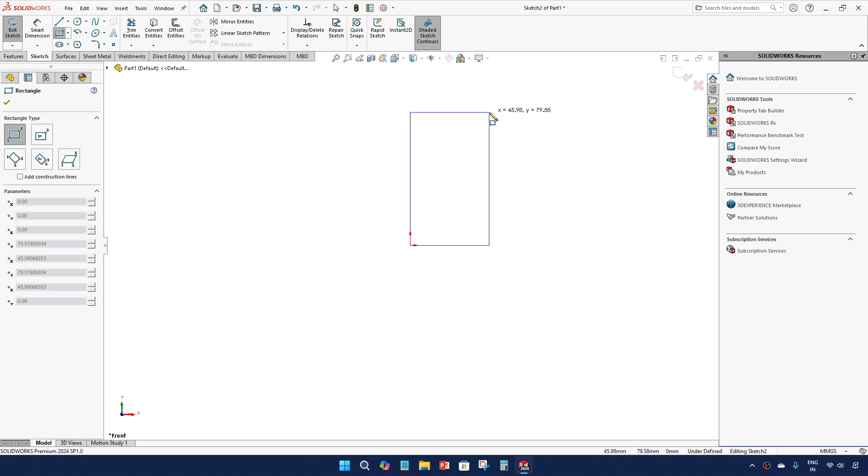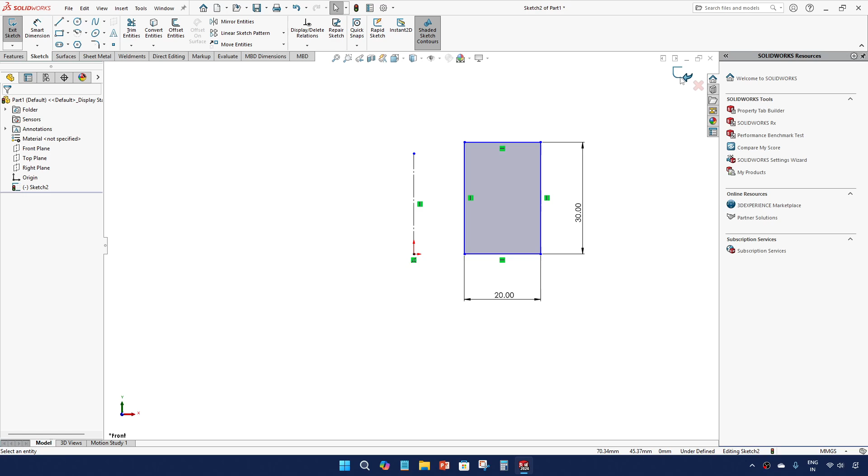So first I'll select the plane and I'll create this. Okay. So instead of creating at the axis, I will give a rotating axis. That's it, I'm not gonna constrain. Okay. So by selecting that axis, it has revolved my sketch.

So same as in extrude, up to vertex: if any vertex is there, it will revolve up to the vertex, and this is up to surface. This is offset from surface. This is mid plane, and I'm gonna explain everything to you. First, let's create one vertex and one surface.

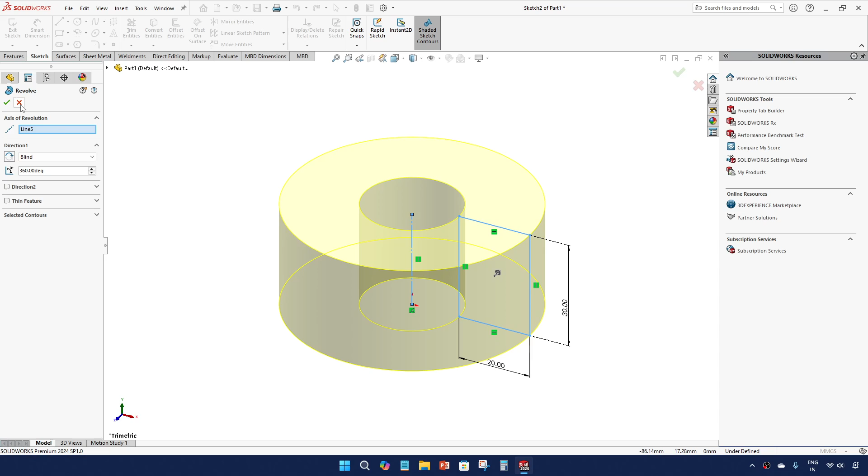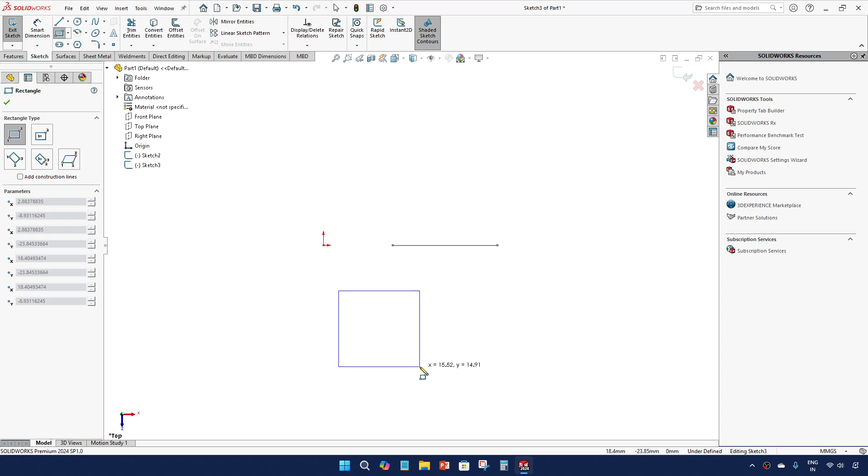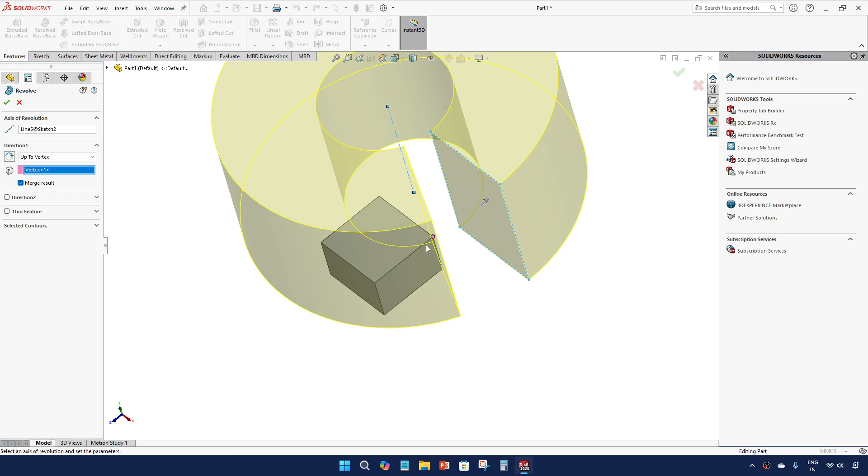Let's say just revolve. When I give up to vertex, as you can see, it is revolving only up to the vertex. If you flip it, you can see it is revolving only up to the vertex, same as up to surface also.

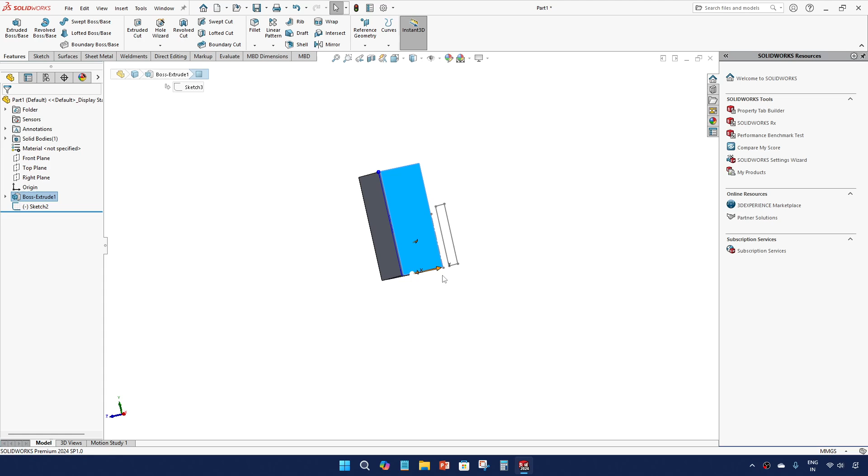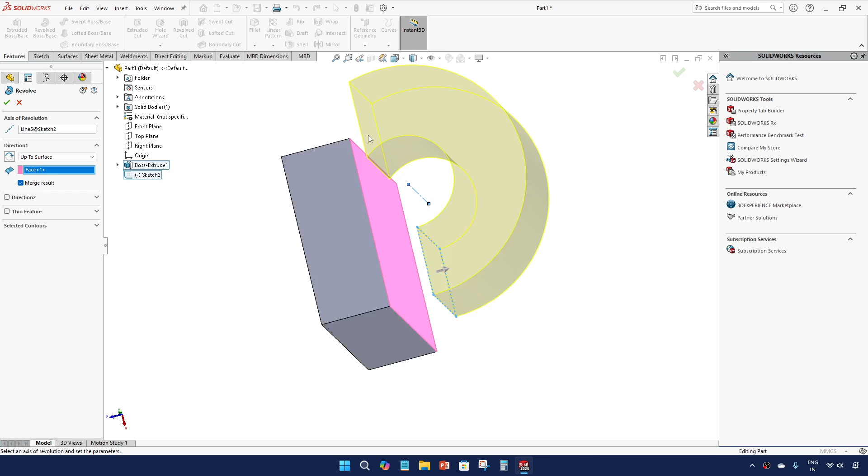Revolve up to surface. Now you can see it is considering this surface. If you give flip, it is revolving up to here.

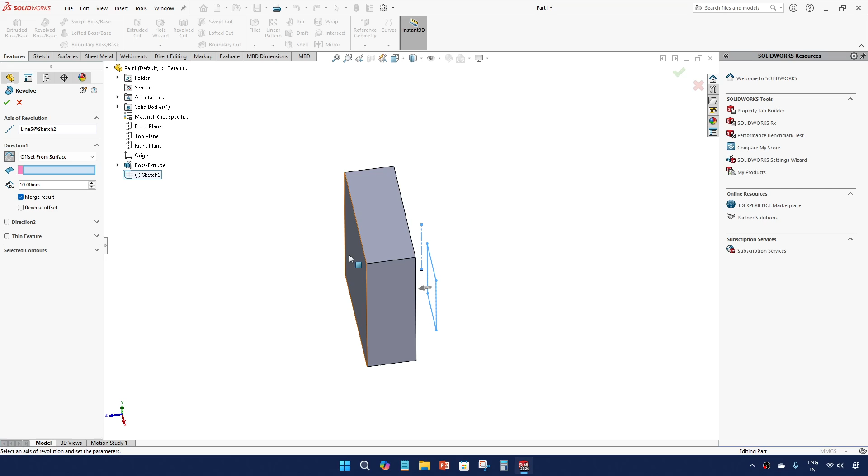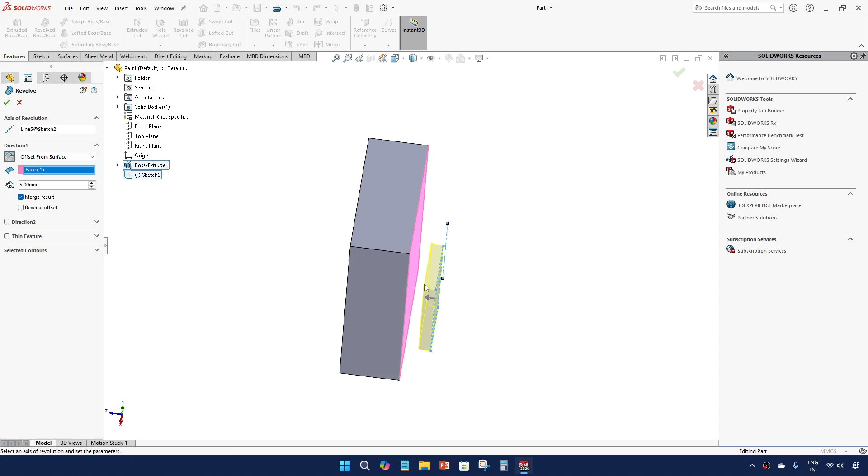And then offset from surface. I'll give offset from surface, and I will take this surface. The reason why it is not taking this face is the revolve does not go completely into this space. That's why it's not taking.

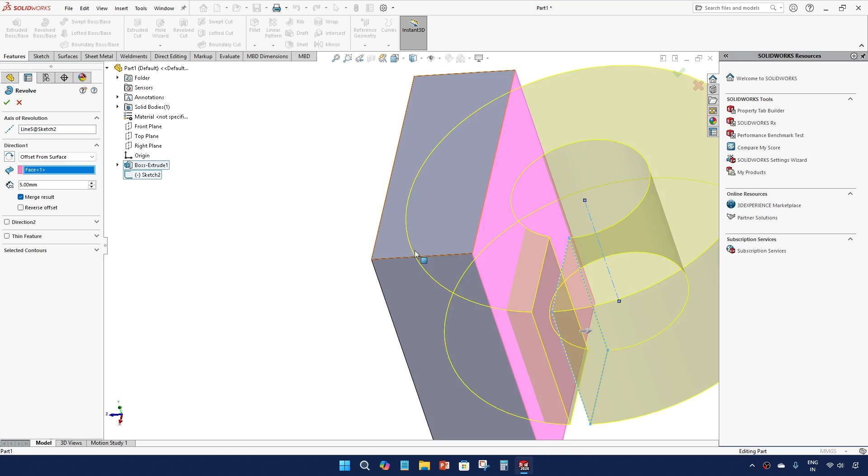See, this cut is not completely going into that. That is the reason it is not taking this face, but it is taking this face. From this face, the end condition is 5 mm offset from this surface.

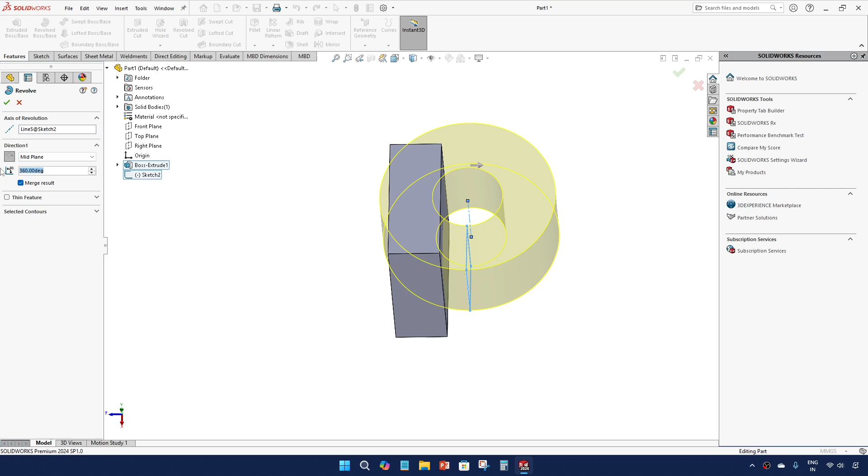So this is mid plane. When you give mid plane and select 20 degrees, it is revolved 10 degrees this side and 10 degrees this side.

These are all the options in revolve, and for all the remaining options here, please refer to my previous extrude video, because everything will be the same. Merge result, thin feature, selected contours, everything I have explained in my previous extrude video clearly. So this is it in revolve. I hope this clears the revolve option.